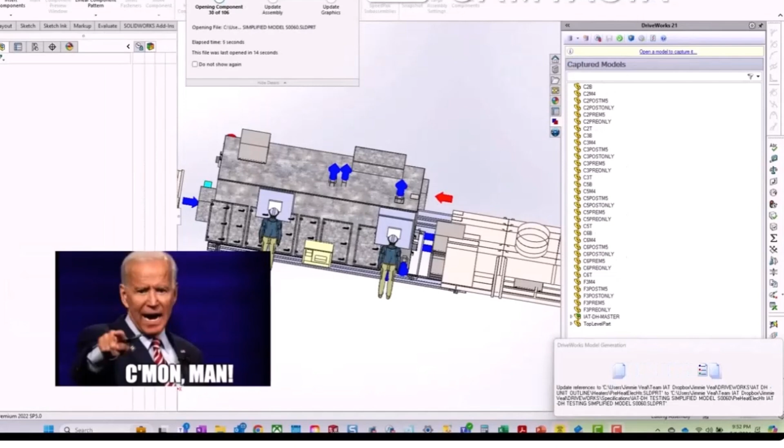Still, something in that chaos clicked. What if the solution wasn't more control, but less? One file instead of many, one process instead of a maze. Suddenly, complexity started behaving like an old friend.

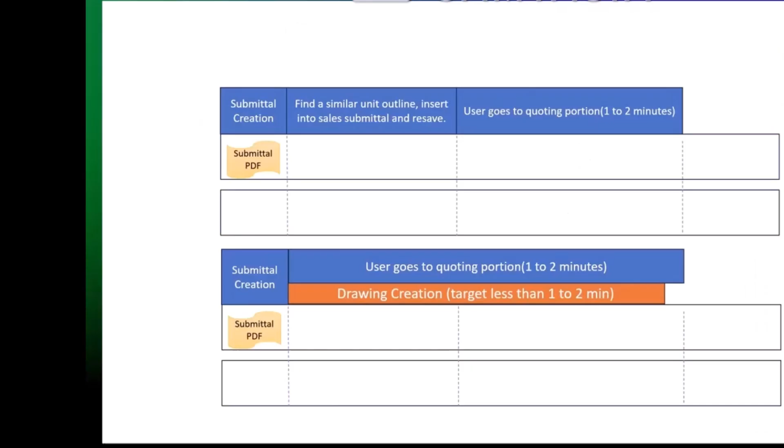James asked for screenshots. I gave him a movie. The models loaded in seconds, so fast I had to slow the video down just to make it believable. And somewhere in there, we stopped chasing perfection and started trusting the process.

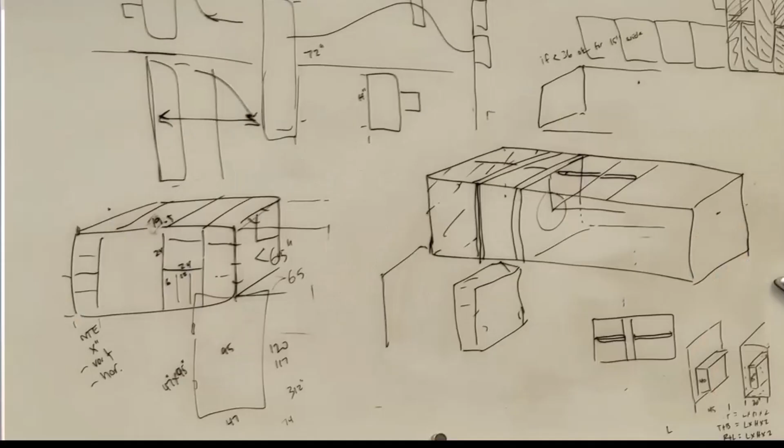We call it DriveWorks Reimagined, a cleaner, faster, more confident way to design. It's not about replacing the engineer. It's about giving them room to breathe, to create, to laugh when the balloons overlap, and to know it'll be better next time. The pursuit of the perfect drawing continues. But now, we're running it together.

Okay, give me just a second here. I swear this thing was open 5 minutes ago. Hang on, this part's not automated yet, boss. You look like you could use a hand. Hang on, I'll get it. Come on, Jimbo, you didn't bring me on to just sit around with my hands in my pockets. Let me handle this one. Fine, go for it, Whistle Britches.

Hey, folks, they call me Whistle Britches around here. I've learned to accept it, and I'd appreciate it if y'all respect it. Where'd the name come from? Well, there's only 2 people that know that story, and one of them ain't talking. So, I reckon we'll just keep it that way. Now, Jimbo recruited me to help keep things moving around here. If you heard him try to explain something, you'll know why I stepped in to present. So while he's grabbing a cup of coffee, or maybe a nap, I'll show you what we've been working on.

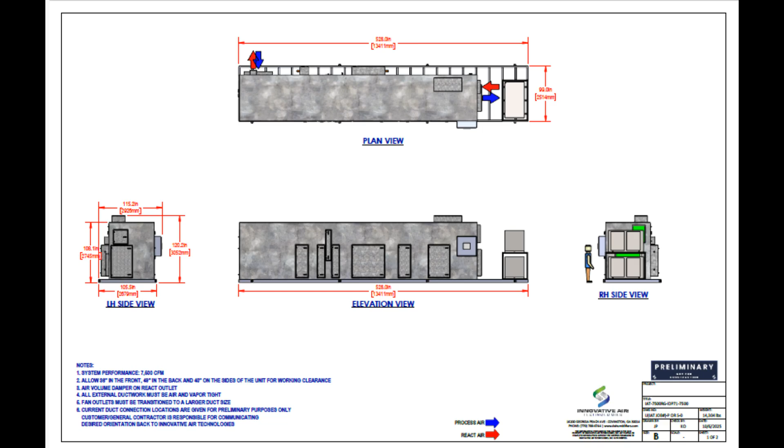Alright, let's rewind just a bit. Balanced Design Solutions signed up to automate your sales drawing process back in phase 1. Now, from what I understand, that was a task that used to chew up a lot of your mechanical design team's time, 2 weeks, easy, just to get a quote out the door. So in phase 1, y'all scratched the surface, got a few top-level configurations in place, and cut that down to about 5 minutes. But let's be honest, that just wasn't good enough, was it?

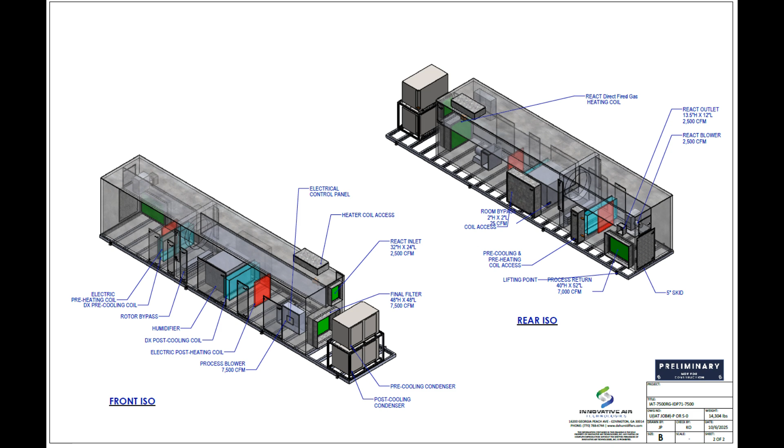That's where phase 2 comes in, where old Jimbo might have bit off more than he could chew. This might look familiar. He mentioned he might spruce this up a bit. Well, let's see. Before we get into that, let's go ahead and kick off this specification. We'll just run the defaults to get something rolling and get back to the user interface.

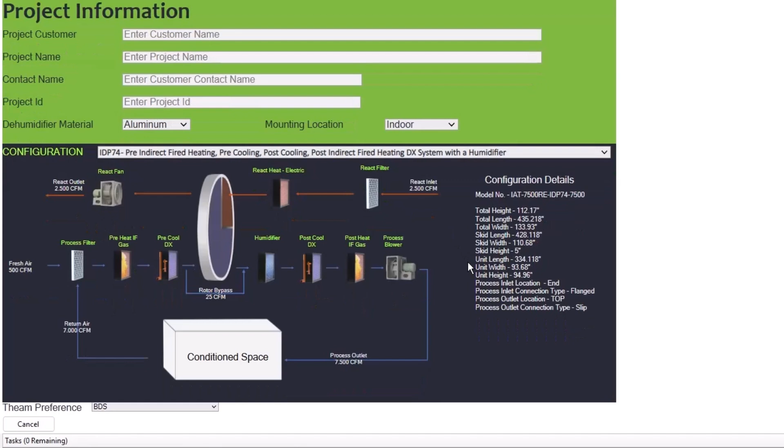Okay, let's see here. Okay, yep, definitely looks different. Alright, we'll get this snake rattling now. Break it down. Here, there we go. We'll just tuck you away right here while we look around a bit.

Alright, we'll launch a new spec and take a look under the hood. Up here, you've got 4 buttons and it defaults to the project information page first, just to get the basics filled in. Now, this configuration drop-down can be found on every screen. It's a list of 84 top-level configurations.

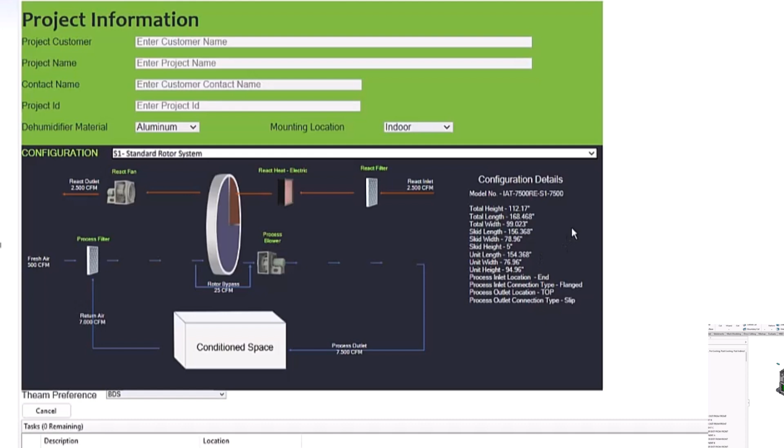You might have noticed this flow diagram here on the screen. Well, this right here is your instrument panel. It keeps up with your choices almost as fast as you can make them, and remember, you can change that top level configuration at any time. Alright, while that first model is finishing up, let's hop on over to the process air screen and take a look.

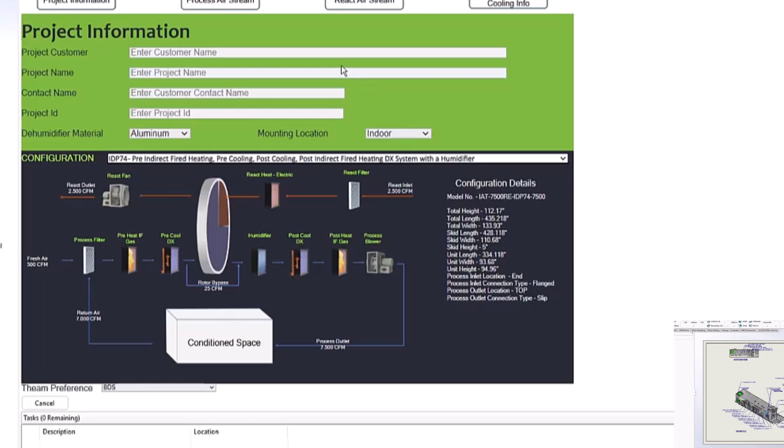Okay, nothing too fancy here. You got your configuration drop down, your dynamic instrument panel, and something else you may have noticed: your choices will guide the available downstream options in order to reduce the clutter on the screen.

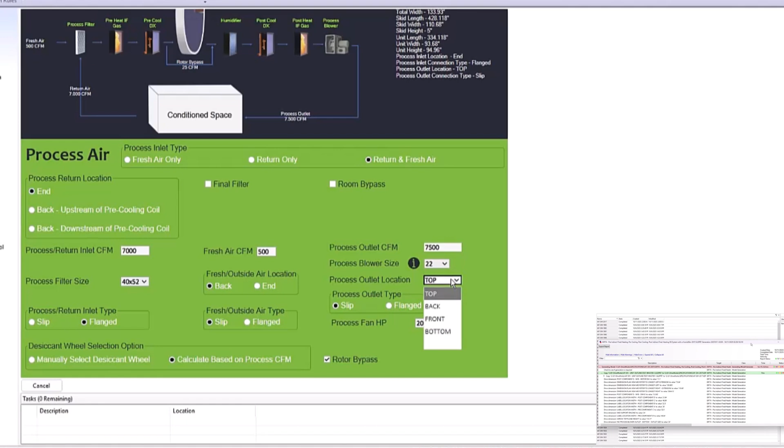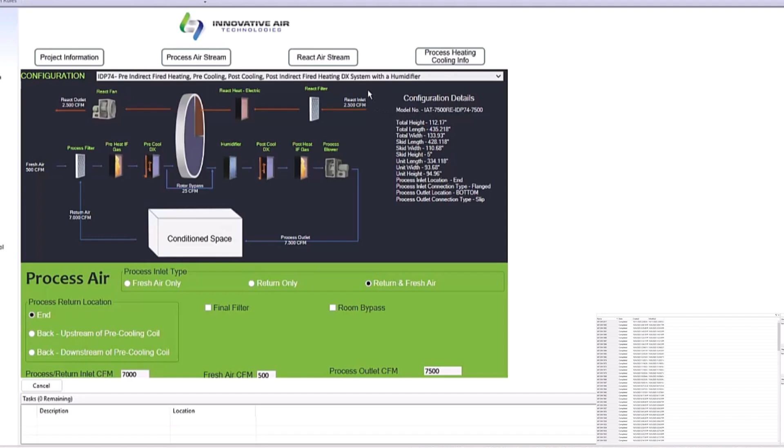Alright, okay, I see the model generation is complete for the first specification we ran. We'll take a look at the output if we have time. Alright, really not much more to talk about here. Here's something that might be useful. For your process and React blower selections, there's a little information icon. If you click it, a table will pop up to give some likely choices for matching up the CFM requirements.

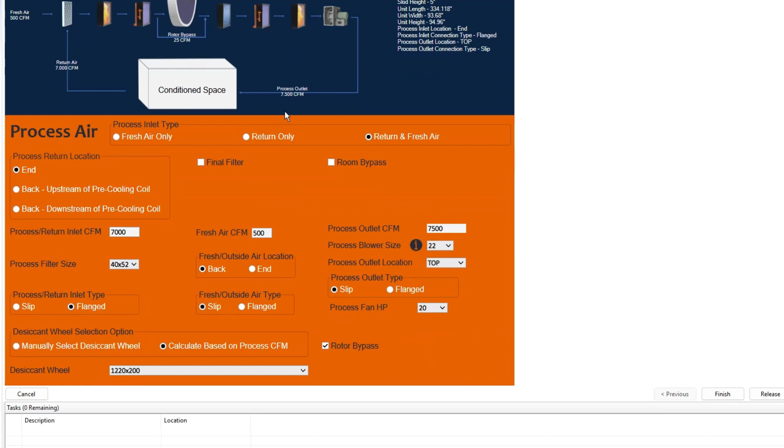Now, there's one more thing old Jimbo cooked up that I think y'all will like. The inspiration came when he was talking to Joe Aisawa over at Go Engineer. Joe mentioned a young lady who built in an option for her users to switch to dark mode. Got old Jimbo thinking, and this is what happens when he gets to thinking.

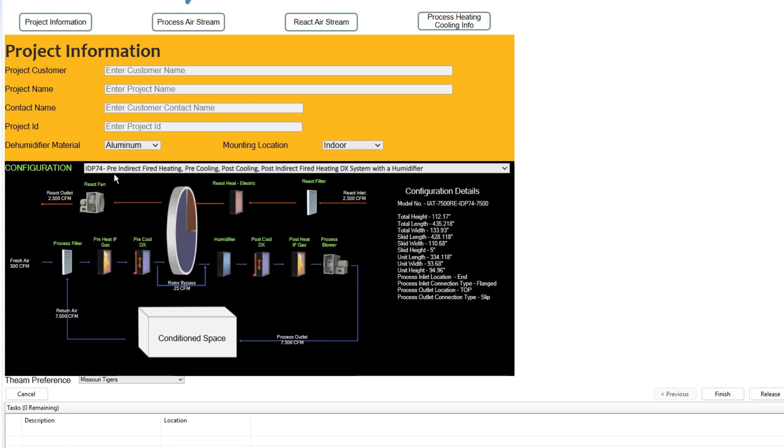See, if he ain't thinking about something nerdy, there's a good chance he's thinking about Auburn football. Since he knows some folks prefer other teams, he decided to provide options for every team in the Southeastern Conference. Now, something he thinks is funny, but I've tried to tell him otherwise, is the way he labels the theme preference drop down. He says, Auburn is my favorite theme, what's yours?

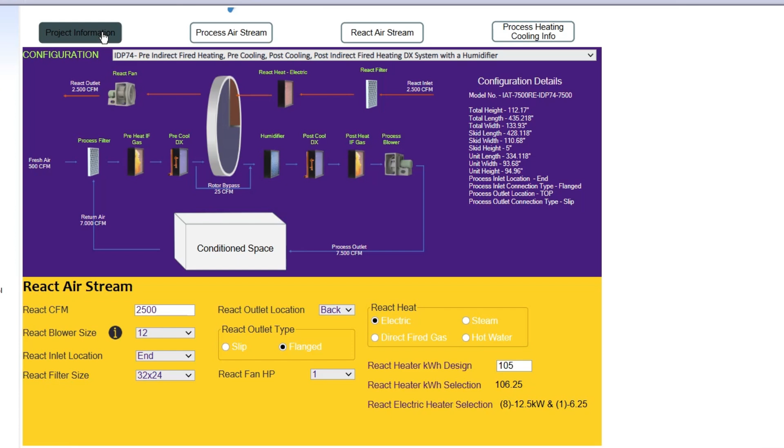Some things you just embrace and keep moving. Of course, he didn't stop there. There's a theme for a bunch of holidays and even one for Innovative Air. I'm done talking now. I'll show the output from the spec we ran during the outro.